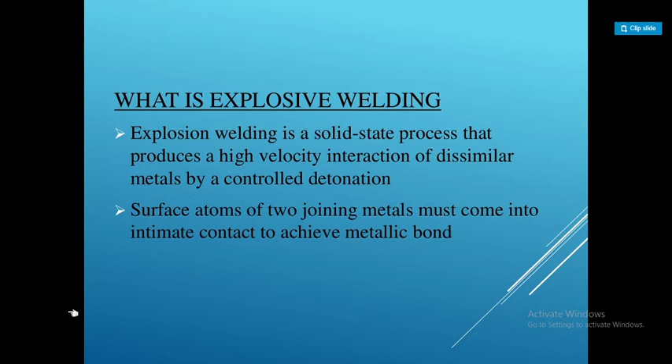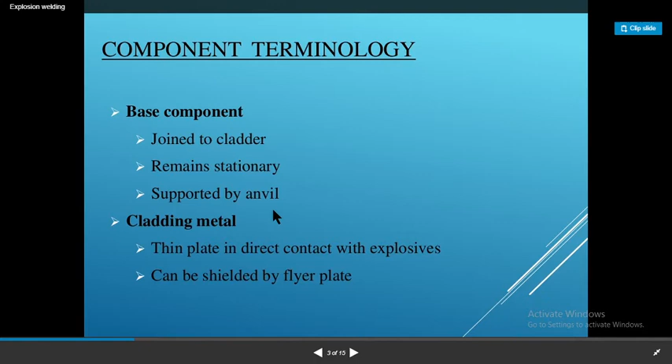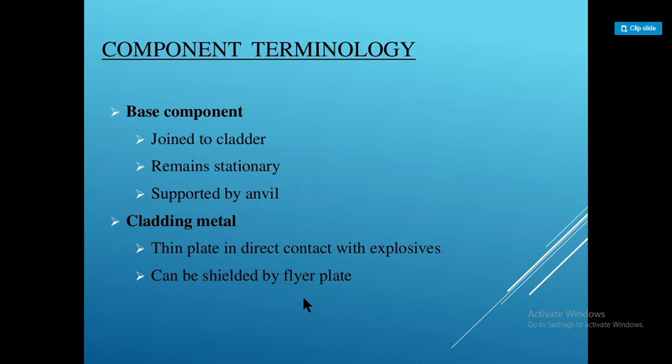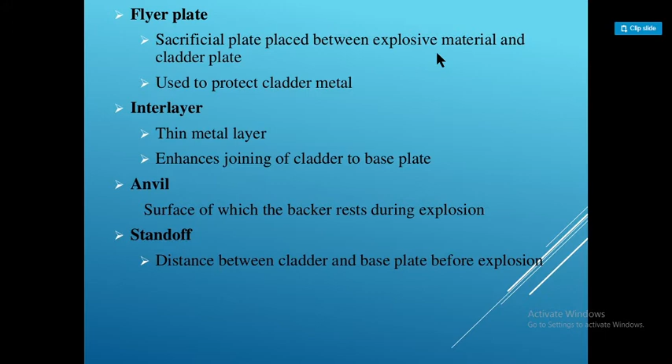The base components are joined to the cladder, remain stationary and are supported by the anvil. Then the cladding metal is a thin plate in direct contact with the explosive, and can be shielded by a flyer plate. The flyer plate is the shielding provided to the cladding material. It's a sacrificial plate between the explosive material and the cladder plate. So it is the component which saves the cladder plate by directly coming in contact with the explosive, because the explosive may damage the cladder plate. So it is used to protect the cladder material.

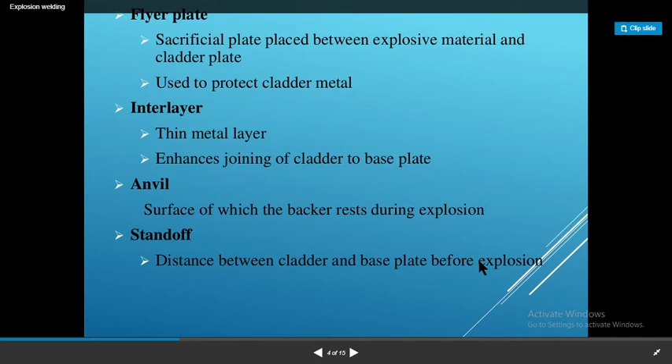So the cladder material can be placed parallel or inclined to the base plate. Actually this is parallelly placed, or sometimes you may keep it inclined also. Explosive material is distributed over the top of the cladder metal. Upon detonation, the cladder plate collides with the base plate to form the weld.

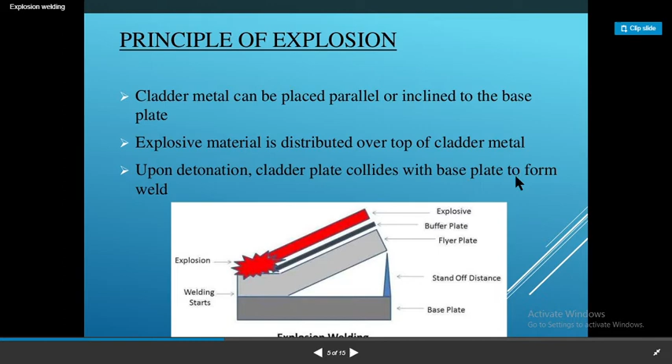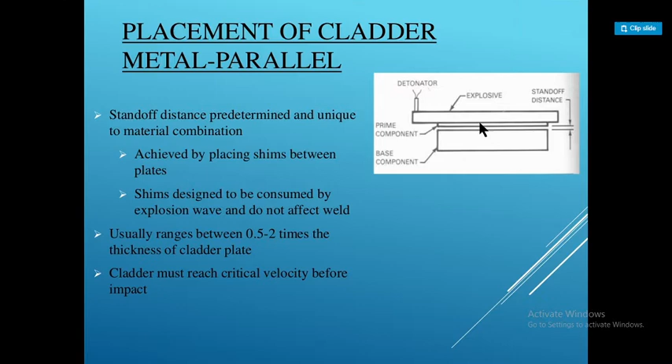Standoff and placement of cladder material parallel. Here you can see the parallelly placed cladder material. This is the base component, then the prime component, or you may call it a flyer, and below this we have the cladder plate. This is the explosive, this is a detonator. The detonator is used to explode the explosive material. This is the standoff distance. So what will happen when the detonator energizes? It explodes the explosive. Because of the explosion, the prime component or flyer directly collides with the base component, and joining or fusion of the base component and the cladder material occurs there.

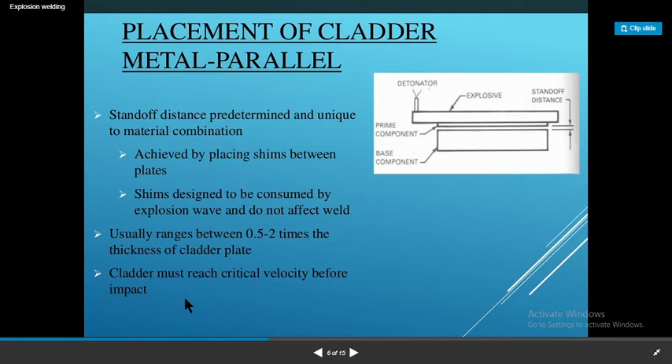The standoff distance is predetermined and unique to the material combination, achieved by placing shims between the plates. Shims are designed to be consumed by the explosion wave and do not affect the weld. The usual range is between 0.5 to 2 times the thickness of the cladder plate. The cladder must reach critical velocity before impact.

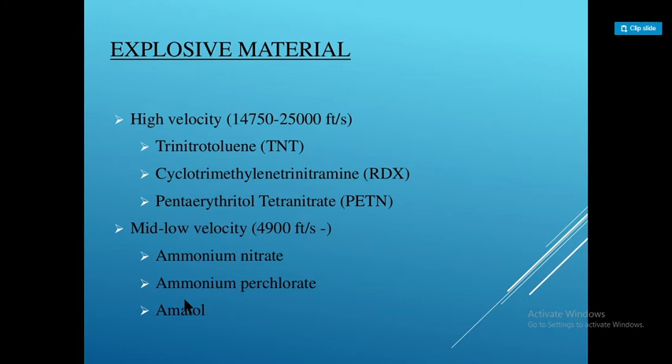The explosive material which we are going to use in this process should have high velocity, in feet per second 14,750 to 25,000. Examples can be trinitrotoluene, then cyclotrimethylene trinitramine, then pentaerythritol tetranitrate. Then some have mid-low velocity, which is 4,900 feet per second: ammonium nitrate, ammonium perchlorate, then amatol.

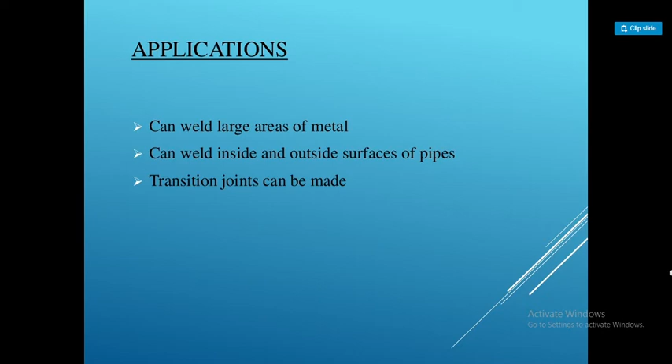Then discussing the applications, it can weld a large area of metal, and can weld inside and outside surfaces of pipes. Transition joints can be made using this explosive joining process. Common industrial applications that use explosive welding are chemical processes, petroleum refineries, hydrometallurgical, aluminium smelting, shipbuilding, electrochemicals, oil and gas, power generation, cryogenic processing, pulp and paper, air conditioning and chillers, and metal production. All these are practical applications of explosive welding.

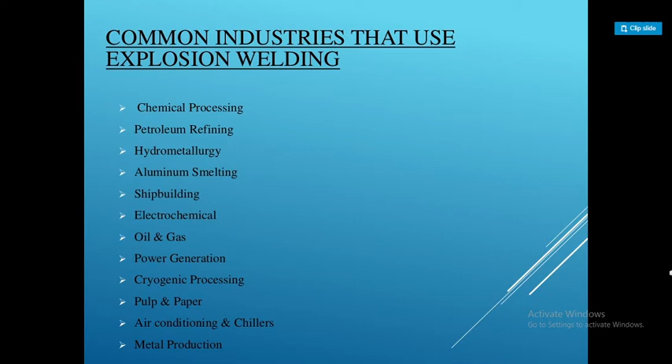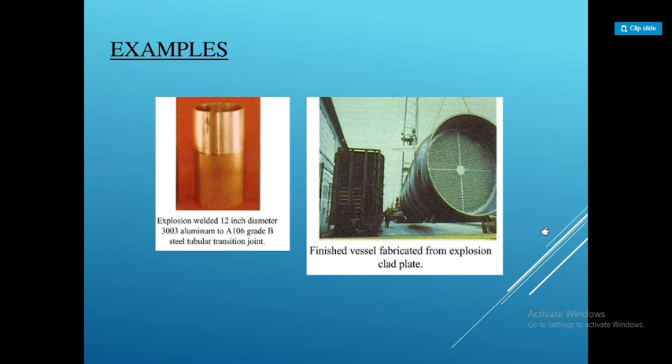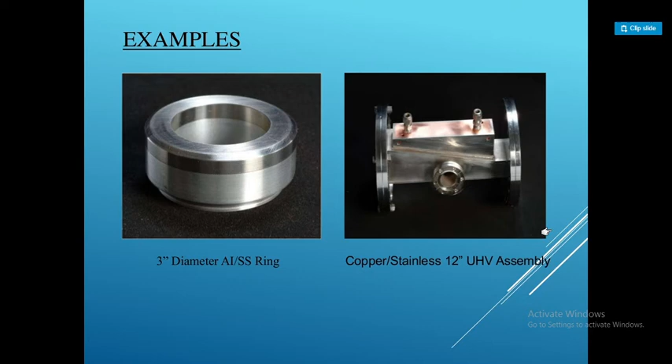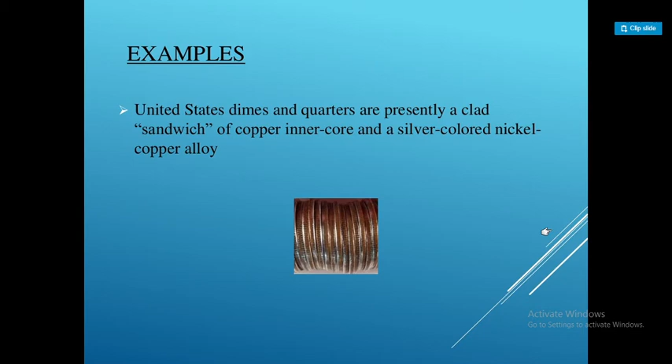Here are some drawings where you can see the application of this explosive joint. Here you can see explosion welding of 12-inch diameter aluminium to A106 grade B steel tubular transition joint. These are the finished vessel fabricated from explosion clad plate. Here also explosive joining or welding can be used. Then these are examples where 3-inch diameter rings are to be welded. Then this is a copper to stainless 12-inch UHV assembly. United States coins, the quarters, are presently a clad sandwich of copper inner core and silver colored nickel-copper alloy. In this way you will get clad material like this.

Then advantages: it can join both similar and dissimilar metals. Simple in operation and handling. Large surfaces can be welded in a single pass. High metal joining rate; mostly time is used in preparation of the welding. It does not affect the properties of the welded material. It is a solid state process, so it does not involve any filler material, flux, etc.

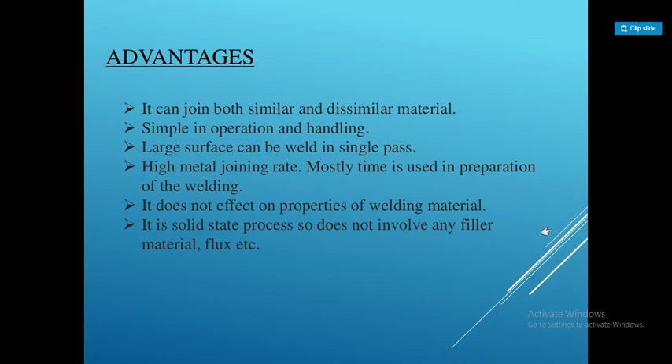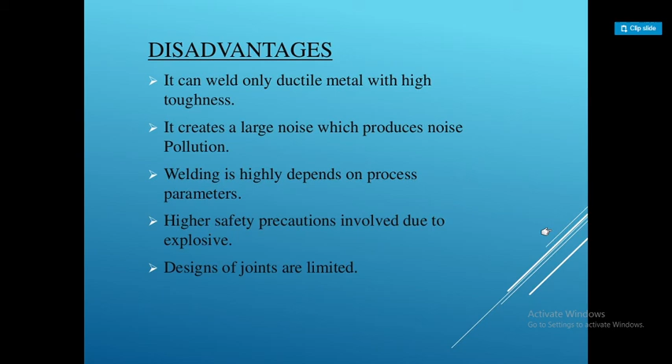Okay students, so here our chapter ends. From the next lecture we will start our chapter number 3, and you know that the name of chapter number 3 is hybrid non-conventional machining techniques, where we are going to see the main process, which is shortly called STEM. Full form is shaped tube electrolytic machining. Electrojet machining is also important in chapter number 3. This chapter is also a very important one, and we use it in the practical field also.